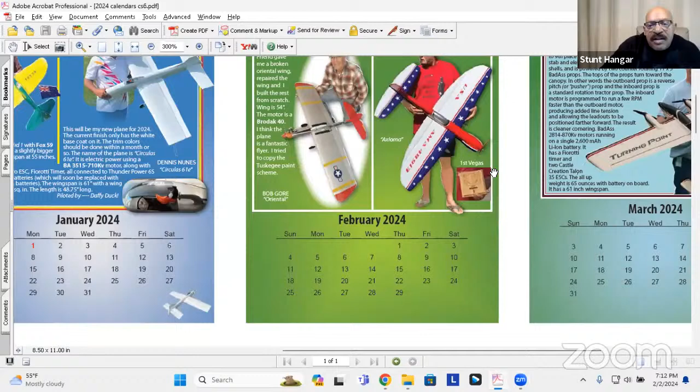Hopefully that. Okay, so this is Robert Gore and Mike Lonke. Robert Gore has his Red Tail Oriental, and then Mike Lonke has his Axioma, and that's for February. You'll have to reissue January because Dennis has his airplane painted finally. Oh, Dennis? Great. Let me stop sharing now.

So that's what Gary does for us. He does these calendars, and every month we're going to show a new plane or people.

And so here we are, 7:13. I think John Miller, you asked me earlier, could I hear you? I think I could hear you momentarily, and I think it's working for a little bit. Well, hopefully your bandwidth will stay good. And another couple more minutes.

And then we have Paul Taylor saying, hey guys, as Jim Lynch used to say, it's just balsa wood and paper on building planes. I guess that's for you, Peter. And then Daniel Barry Sports Highlights says, yo, thank you. I'm missing my comrade, Marcel Legrand. He usually says something about stunt school. And then Brent Williams says, howdy.

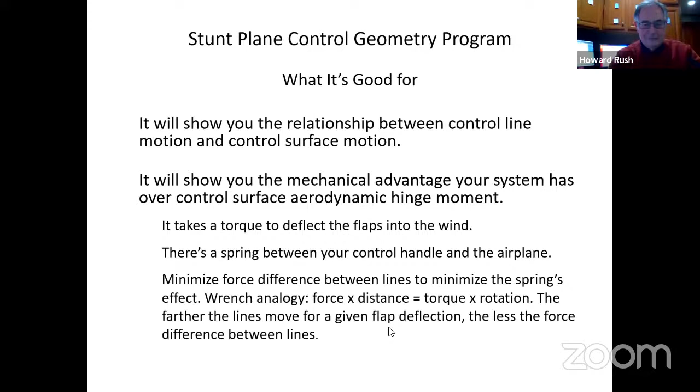I think the hinge moment thing is important, and having leverage over it is important. And now, how to use the program.

It says, behold the definitions and assumptions. Now at this point I have to switch programs - we've been practicing this, and I'll see if I can do that. Which one do I go to? The Nobler.

When you open the program, it comes up on this definitions and assumptions page. You look at that to see what I call zero and which way is positive - like sideways is positive out the right wing, and stuff like that. And the assumptions, like it doesn't work for self-centering bell cranks, and a lot of stuff. So check that out.

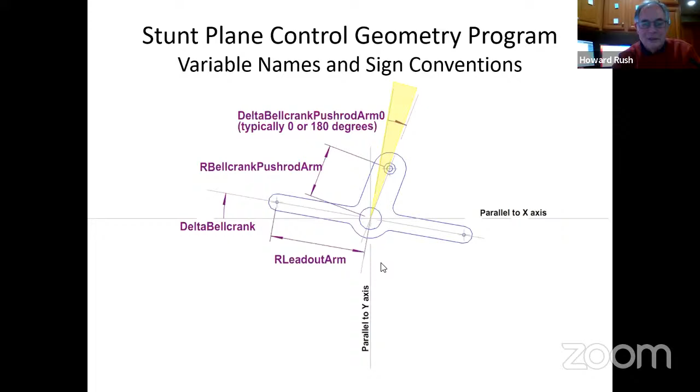Let me call your attention to the bell crank cartoon. There's one parameter here that has a big effect on control system symmetry and linearity: how far the hole on the output arm is rotated from perpendicular to the axis of the bell crank. I'll show you more about this later, but when you're messing with this yourself, be sure to fiddle with this dimension. Try stuff out because it often has a big effect.

Okay. Now, go to the input sheet, your values. We're supposed to show the input sheet. So I've got to go back to the Excel program.

Where'd it go? That one, not this one. There. Okay.

Here is the input sheet where you put the stuff. And you see that? See the yellow stripe there? Yes, good.

Let me point out the sign convention thing. Heed the sign conventions. By standard airplane signs, distances out the left wing are negative. So the distance to the left wingtip where the lead out guides are is a negative number. When I put in numbers as an example for a Nobler, I forgot to make this negative, and I spent much of last Saturday trying to get this thing working because I forgot to put in a negative number.

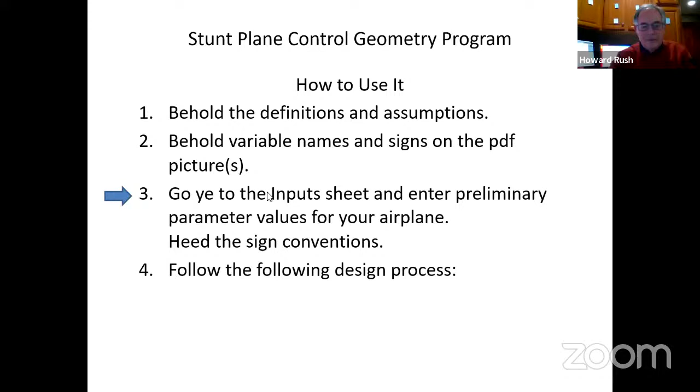Now we'll talk about the design process, what I think the design process ought to be. I'll have to go back to this thing. So that was a pretty fast transition through all of the design process.

First, pick a maximum flap deflection. Don't pick any more than you need because you'll be sacrificing leverage over the system. Can you see that now, Charles? Pick maximum flap deflection. Yes, sometimes I see things here and I'm the only one seeing them. The default is 30 degrees, and I've always used 30 degrees because I don't know what the maximum flap deflection ought to be, and I don't know if the program works for anything else. It probably does.

I suspect we don't use any more than 20 degrees. I've got instrumentation on my airplane, but I haven't recorded it yet, so I'll find out how much my airplane takes and report that, but it might be different from yours. We put a camera on one of Paul's airplanes once and watched its flaps, but it wasn't calibrated. Looking back on the fuselage, it's hard to tell how much the flaps move, and we didn't put any marks on. I should have taken a Sharpie and put a mark on there at 30 degrees or something.

Next, pick a handy flap control horn size. What are we doing nowadays? About 1.5 inches—yeah, use that. It's an independent variable, flap control horn size. Well, the way I do it, it is.

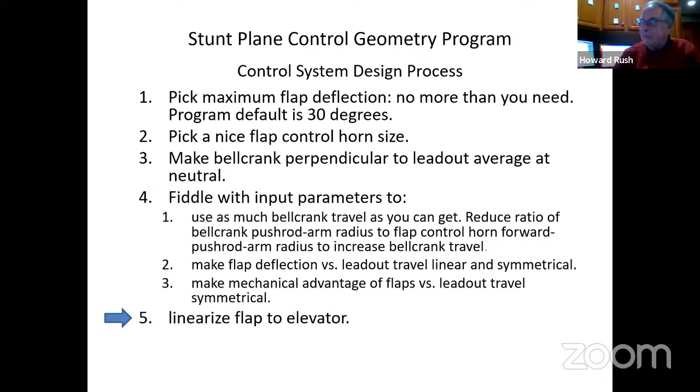Then after that's done, linearize the flap to elevator. I'll go ahead and talk about that now because it's here. It's easy because it's all in one plane. Typically, it's not too far off usually from a plane.

The control horns and the push rod. So you put the control surfaces in neutral and run the push rod between the control horns, make the control horn uprights perpendicular to the push rod, and you're in business.

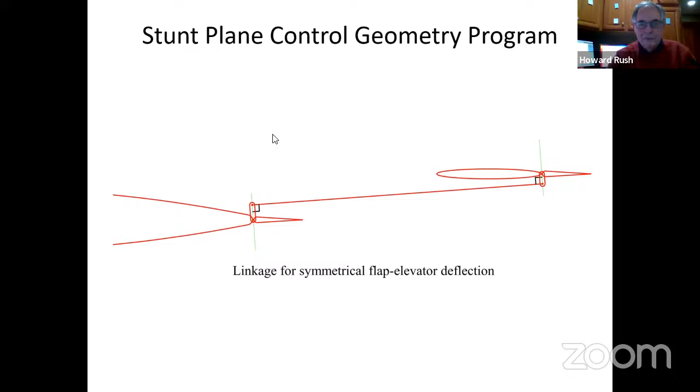Now back to the Nobler. Here's the input sheet to the Nobler. Once you've put in the numbers, the initial numbers, you push that button and it will lead you to this chart.

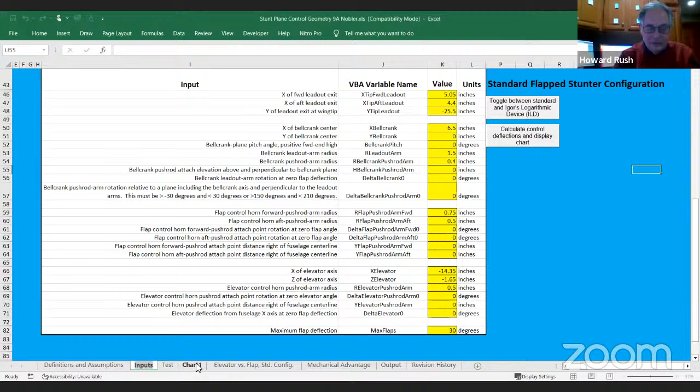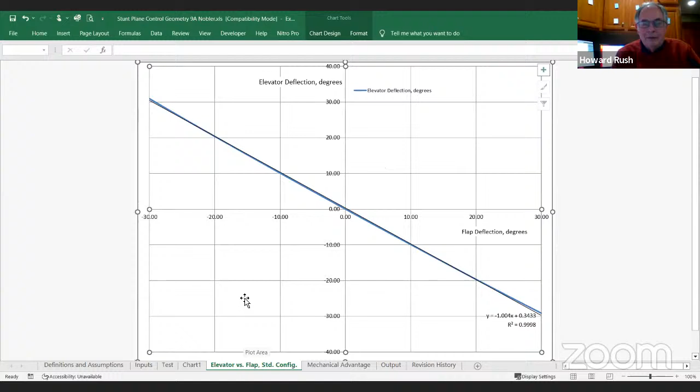I'm looking to see what I'm supposed to say now. Oh yeah, this is an aside -- elevator versus flap on the original Nobler is 1-to-1. You can't see it now. You can, yeah, you can. I've heard rumors that it was not 1-to-1, but it is on George's drawing.

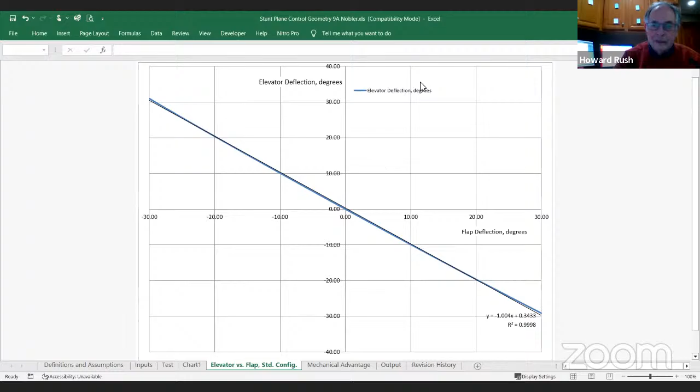Okay, now here's the tricky part. Well, I guess I can get there this way. I fiddled with the inputs on the Nobler, and I'll show you what I came out with. Well, I think I'll show you. Yeah, there we go.

I changed these items, these in the gray cells. You see them, Charles? Yes. See the gray cells -- and there's the famous push rod arm rotation on the bell crank.

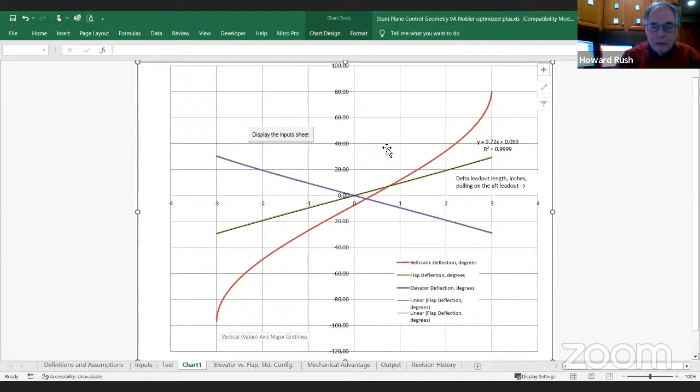Going to this chart, see, I was able to move the bell crank even more. It's almost plus or minus 90 degrees. It goes to 100 here because it's askew a little bit -- it doesn't go through 0, because leadouts go back from it, I guess. And this line's nice and straight.

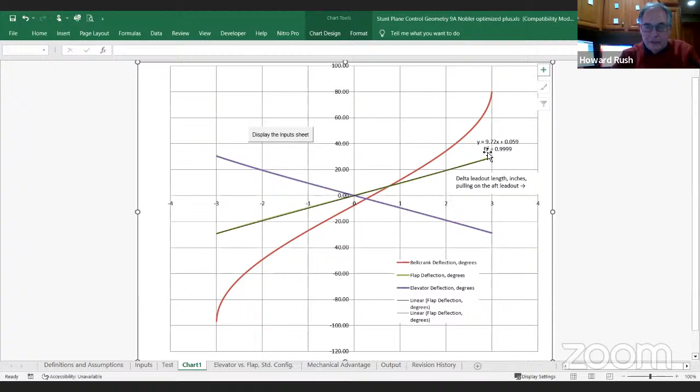And mechanical advantage, isn't that pretty? It's all symmetrical now, less than it was. So that was pretty cool.

Now let's see -- the mechanical advantage improved by 6%, but I tacked on a 5-inch or a 4-inch bell crank just to see what would happen, and got 41% improvement in mechanical advantage, and it didn't deteriorate the shape much.

And here's the output hole -- it's askew 7.6 degrees, wasn't it? Something like that, yeah, 7.6. And I moved the flap control horn forward. That's where it came out.

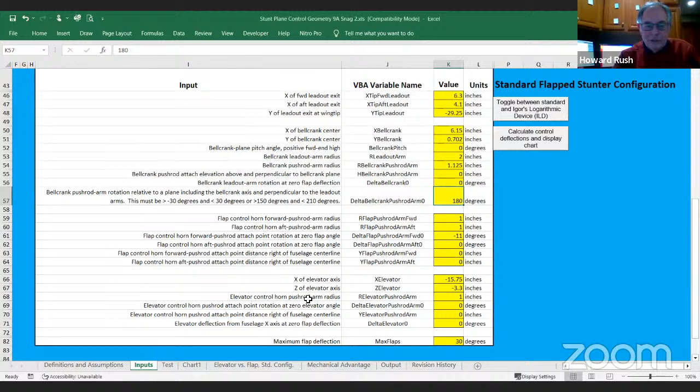Now, see the input sheet, Charles? Yes. Okay. Behold that this starts out with the output from the bell crank on the left side of the bell crank. This is the famous reversed bell crank. Looking at what these numbers give you, this is the stock Snaggletooth 2.

The flaps versus lead outs line slope is negative because of that reversed bell crank. The reverse bell crank doesn't have any effect on the kinematics, but does on some gyroscopic stuff maybe. But the striking thing about this, I think, was that bell crank doesn't move very far. It only goes like 26, 27 degrees in either direction.

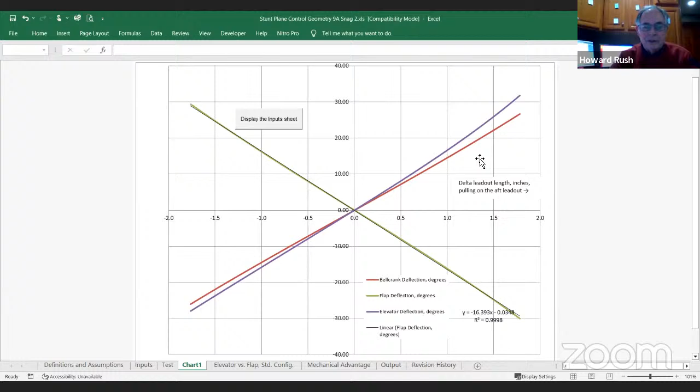And mechanical advantage, this is the flaps here, that's elevator, which I'm not too excited about. Mechanical advantage is nice and symmetrical, but it's not very advantageous. This is 1 over mechanical advantage. 15 is pretty big.

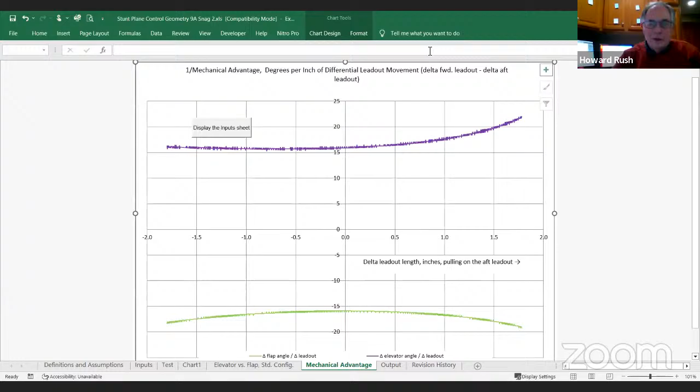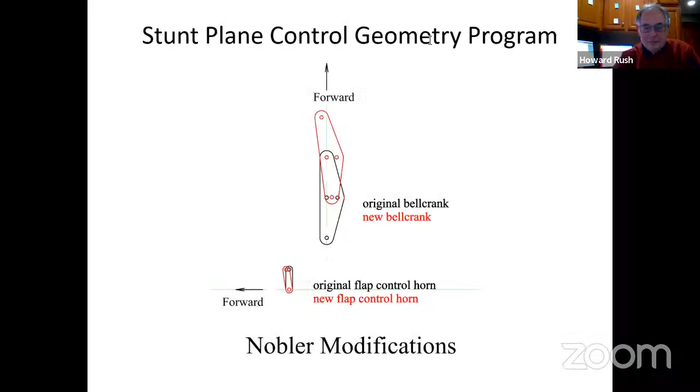So now, according to my notes, we go back to the other thing. Here's the first change I made to the Nobler. I tried to get more mechanical advantage without messing up the symmetry, and I couldn't do it.

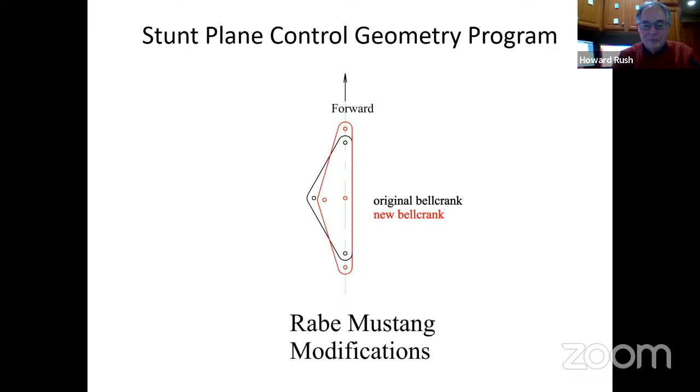So I gave up and put in a 5-inch bell crank, and just putting in a 5-inch bell crank and offsetting that hole came up with a pretty good control system and more mechanical advantage. It was symmetrical. Then I got greedy and tried to get even more and reduce that distance farther, and I had to tweak the flap control horn a little bit. Came out with something that wasn't quite as pretty, but got more mechanical advantage.

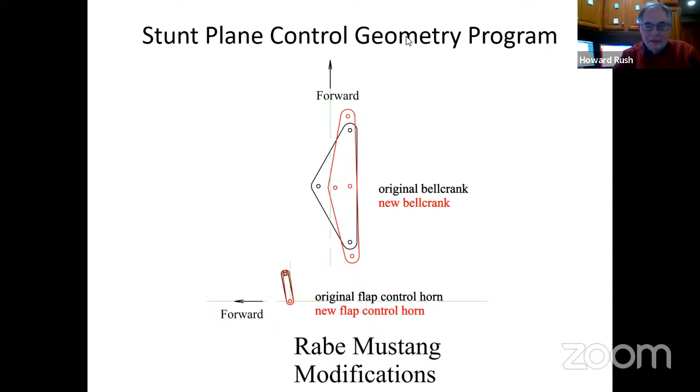Now I'll show you the plots. See the 3 curves there? Yes. Hey, good. And this was the original

flaps versus lead out travel. Lead outs don't go very far, less than 2 inches in either direction. And it's kind of symmetrical, but they don't have much mechanical advantage. The first change gave a pretty nice curve, got a lot more lead out travel, a whole lot more mechanical advantage, 188% of the original.

And then another try, the second picture I showed is 242% of the mechanical advantage of the original. So I'd stop here, I think. But you know, how much mechanical advantage do you need?

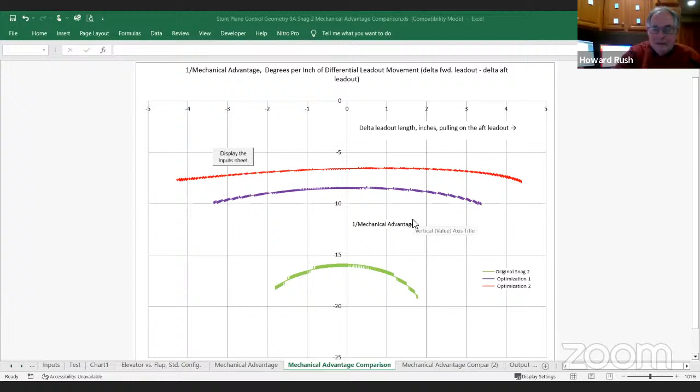It depends on the hinge moment, and it's hard to tell what it is analytically. So I just put in a lot in my airplane, even more than this, I think, especially full flap deflection. And I also plotted this versus flap deflection, which is maybe more useful.

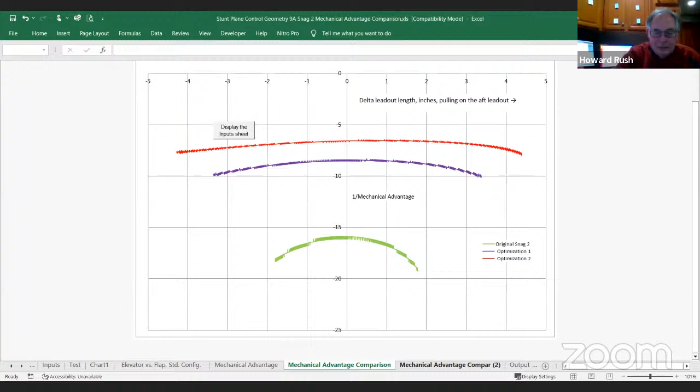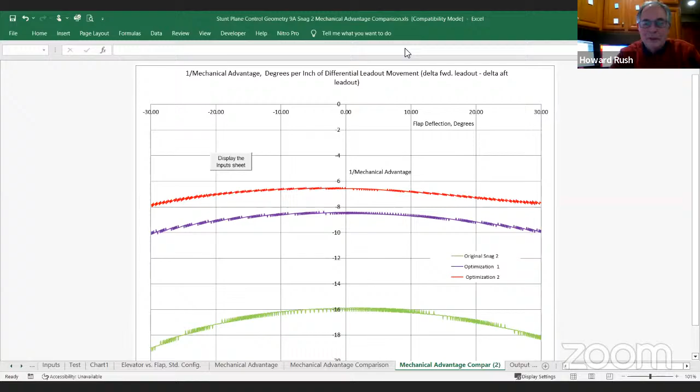There are the three curves. Now, that's it for the Mustang example. I have a conclusion or two, and there's a conclusion. See that? Yes. Yes.

You can't fix airplane control problems with the handle. There's nothing you can do, because the spring is between the handle and the airplane. So you gotta do it in the airplane.

And I have an asterisk here because Larry Ringer has some interesting control handles. There's probably other ways you can do it. If you make a control handle like Orestes's, which is a strap going around a handle, you can tailor the control spacing versus handle deflection with that. And that might do something useful.

The line spacing at the handle is a dependent variable. So once you get the airplane, how it's going to be, you just got to pick the line spacing at the handle that makes it work. And if you have a lot of leverage over the controls, you got a big handle spacing.

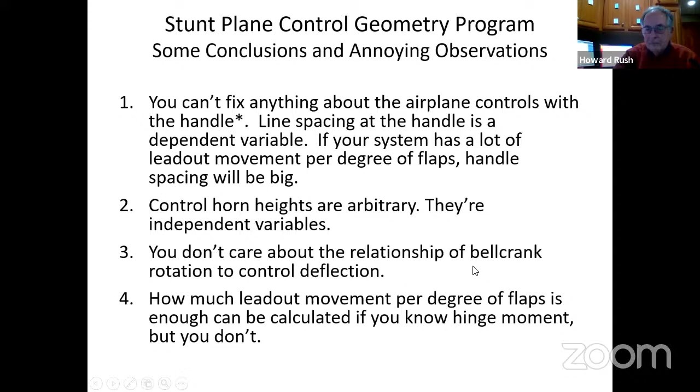The idea that the bell crank isn't in the forward and aft plane, that the rear of the bell crank is lifted — I hadn't seen that, but I'm guessing it's common. Well, I did it on combat planes. And you can do it to avoid obstacles in the wing, like the landing gear mounts and stuff. Although that didn't go in the other direction.

I haven't found that it does much, which I guess is good if you have to do it for some reason, but it doesn't help or hinder one way or the other. On previous airplanes, I found that the sideways location of the bell crank was a big influence, but on the Nobler and the Mustang, it didn't seem to matter.

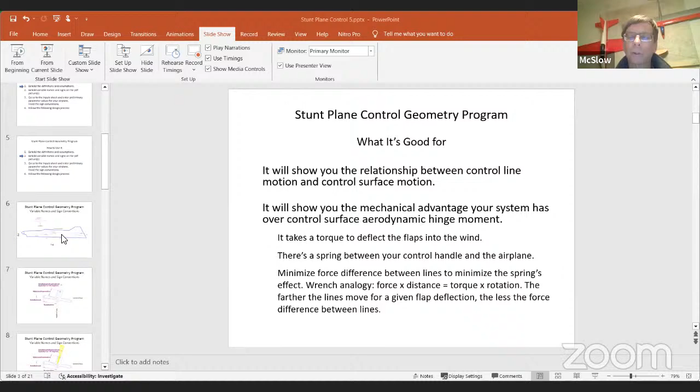I think you're still looking at a tangent of a small angle kind of problem, though, so I don't expect you'd see a lot of influence. Yeah, here's the deal — the tilted bell, you can see there. Now I understand. Yeah, okay.

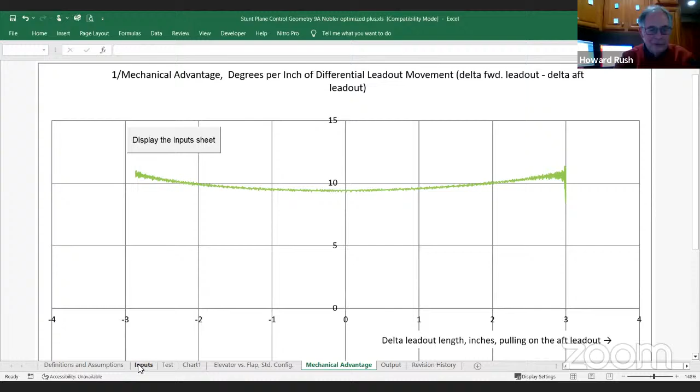A good one would be that Nobler after it's fixed. Yeah, here we go. Oh, did that work? Yes, it did. I double clicked on it and it started working, which seemed to be too easy.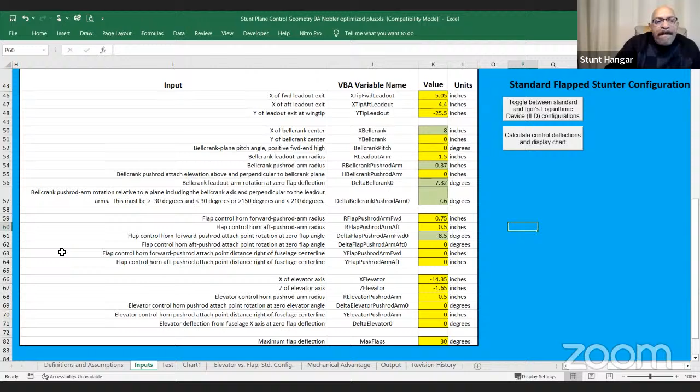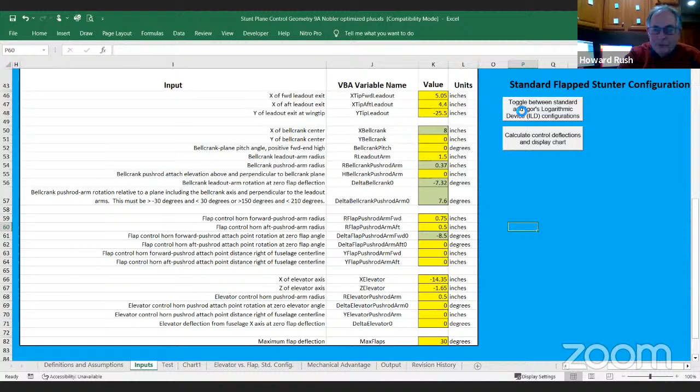Now you see the yellow and gray stuff? These are the inputs available to you. If you have an Igor system, you press this button and it switches to the inputs for the Igor system. Can we get it back? Yeah, toggle back.

Here's the conventional control system. I could go through each one: distance forward of the flap hinge, which we assume is straight, or the flap control horn if it ain't, of the forward lead out; distance forward of the crack of the aft lead out; distance of the lead out guides, the average lead out guides span wise, like from the center of the airplane to the left wing tip.

Distance of the bell crank forward of the crack - that's the flap control horn, where the hinge line between the flaps and elevator, or the flaps and wing. Yeah, that had an effect on the Nobler. I haven't noticed it on other airplanes. You'd think once you get this control system figured out, you could just plunk it down in any airplane, and I don't know why you can't. It's sort of a mystery.

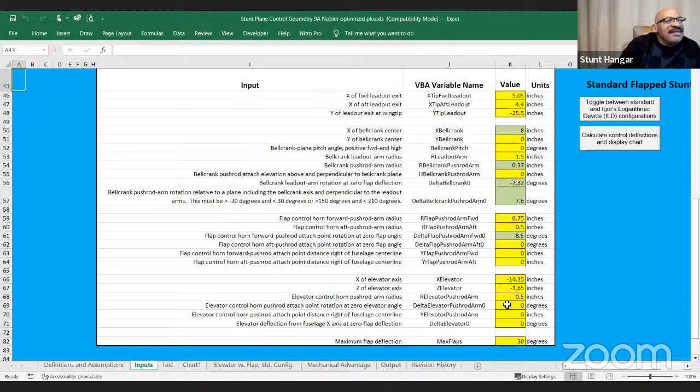What do you think, Paul? Oh, Paul, you got to unmute yourself. I'm sorry, Paul, try it again. He's speechless, try it again Paul. Sorry, my—okay, mistake, there we go. Now the question, I'm trying to remember now—is the larger, 5-inch bell crank worth doing?

Yeah, like you say, if you go to a larger bell crank, you're also squeezing it down at the lead outs and then expanding it back out at the handle. Is there more friction at the lead outs because of that? Maybe. How significant is that? I don't know what the coefficient of friction is between those lead outs and your little guides, etc.

But you got to get around all the structure in there too, and the wing spar is a problem. If you've got landing gear in the wing, you've got structure in there for the landing gear. So this is always the battle I face—I'm a structures guy, I put the structure in first, and then I try to put the bell crank in.

I hate kinks and stuff in my primary load path, but sometimes you have to. It's a battle if you swing that lead out around more. I guess if you made a 6-inch bell crank, you might run into some of the structure for your landing gear, and it's going to come back, and whether it's going to clear the spar depends on how far you move it. Yeah, wouldn't have to move the spar.

Well, your goal is always to move the bell crank as much as possible. Well, yeah, if you want to move it. Well, come on, just say yes, you got it. That was hyperbole there.

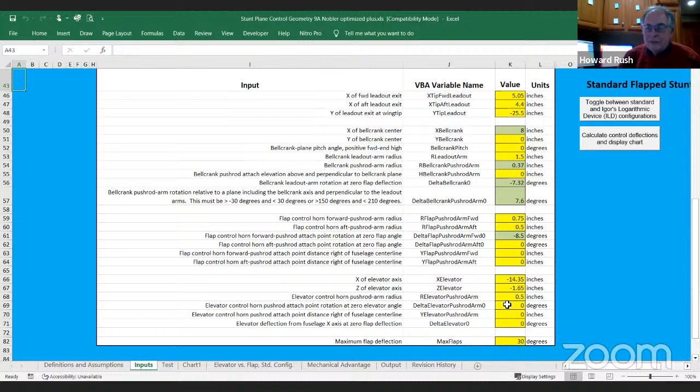So, for a given mechanical advantage, it's pretty much the angle that the bell crank rotates times the diameter of the bell crank. So you could rotate a 4-inch bell crank all the way, or a 5-inch bell crank less. I have a new one I'm thinking of building, and I'm considering a 5-inch bell crank on it. We'll have to see how that works out. I don't know.

Your program is really cool because it can solve numerous problems, and I've had a couple of odd problems over the years. The P47, the first P47, was one of those, because I've got the WFA in it. The P47's got a big fuselage flap. When I put the WFA in it, I said, aha, I'm going to be smart this time. I'm going to put it on the inboard side, so that when I turn the screw, that's the way the airplane is going to go.

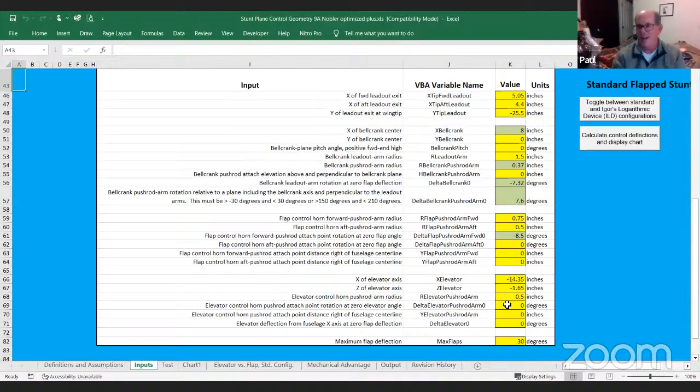Well, that moved all of the stuff way inboard, and so your push rod and Y on your flap, to the elevator and the bell crank, were way off center, and I had to counter that by moving the bell crank. That was really cool because you could just move the bell crank and see the impact it had on the entire control system. It's funny, but it ended up being farther outboard - it's a reverse bell crank, of course - but it went farther outboard to get linearity in the system. So without that, I would have probably put it more inboard, but it wouldn't have been linear if I hadn't paid attention to that. That was very interesting.

So yeah, it does really good things. You just have to pay attention to the sign convention. You'll do something and it's like, well, that doesn't make any sense, why did it do that? Well, when you get it in backwards, it'll do that. Yeah, I better put in some warnings there.

Oh, and thanks, Brandon, for the thing about Kratom. As I said, I'm high, but not on illegal drugs.

Carry on. Excuse me, Paul. No, no problem, I'm done. Any more questions? Oh, I did have one more question.

So your starting input is to put the bell crank perpendicular to the lines as they go out to the inboard tip. That assumes at the beginning you know exactly where the dots are going to be. Well, if you build the same airplane over and over, you get kind of a clue. But you actually build the same airplane.

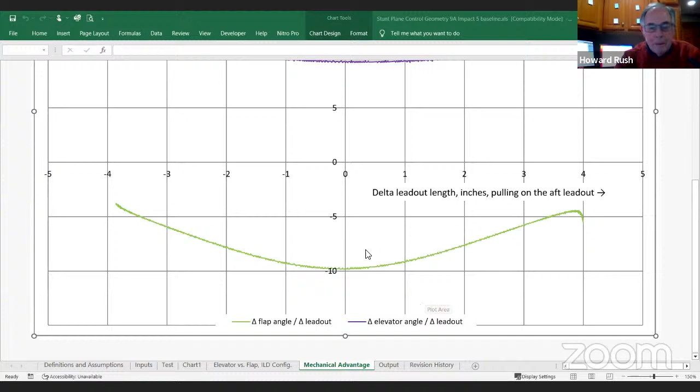Here, I just shared this - this is the airplane I'm flying now, and I should also call up the other impact, which I don't see. Shoot, that's the new dog. They're actually the same theoretically, five and six, and anyhow this curve is concave up, and the other one's concave down - the upshot of that. So yeah, I'm not doing a very good job of showing this.

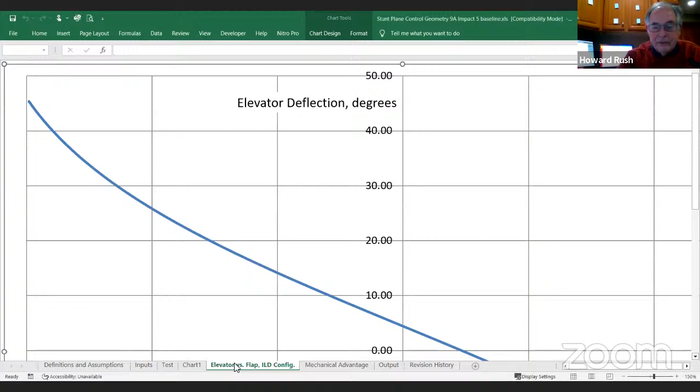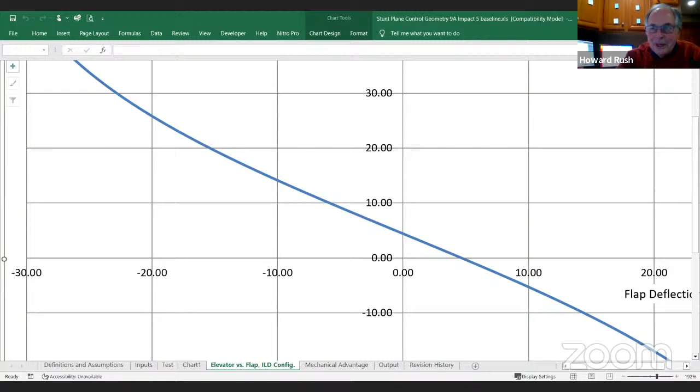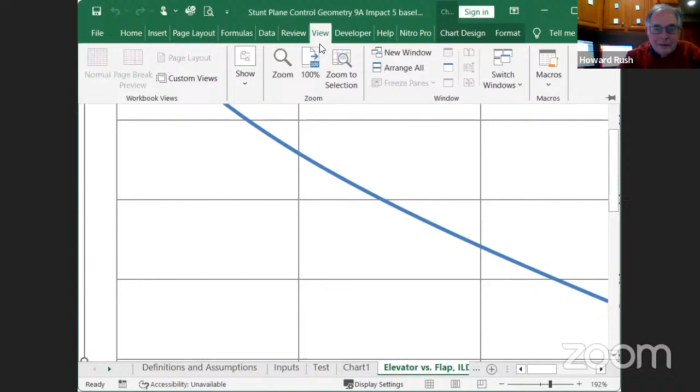And what elevator versus flap looks like on this is, there you go. Okay, there's something in the way - it's a little bias there. Let me see. There it is - see, at least out to 15 on that, it's fairly straight. It starts to slowly move to 20, and then it really takes off.

So if you're just moving them plus or minus 20, you're getting a little bit, but it's not what it could be. I tried playing with setting the flap deflection up to 20 and seeing if I could force it to give me that non-linearity approaching 20, and I could never get it to work.

Now what Bill Werwage did long ago, and I think Chris Rudd reproduced more recently, was a cam following thing. That was a funny thing - it had a push rod that went to the elevator, and then another push rod that went from the elevator back to the cam following thing, which drove the flaps. You think there'd be an easier way to do that? You'd think, yeah.